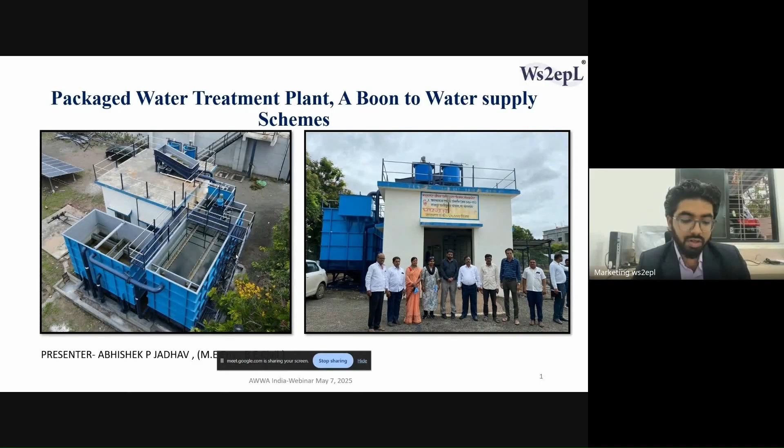Going back to a brief history of water treatment plants across Maharashtra, packaged water treatment plants' parenthood comes from unconventional treatment plants. In the 1970s, mostly large capacity conventional plants were constructed in large cities, and there were no plants in rural areas because scaling down conventional treatment plants meant conventional technologies were not suitable for small plants, as the cost went high.

Dependence on mechanical equipment, rotary parts, and electricity made them inappropriate for rural conditions. So the Government of Maharashtra led a large research program from 1970 to 1980 to find an appropriate solution for rural water treatment. As a result, unconventional plants were developed, which were cheaper to construct and simple for operation and maintenance. The earlier constructed plants consisted of a weir mixer, gravel bed flocculation, tube settling tank, and dual media filters.

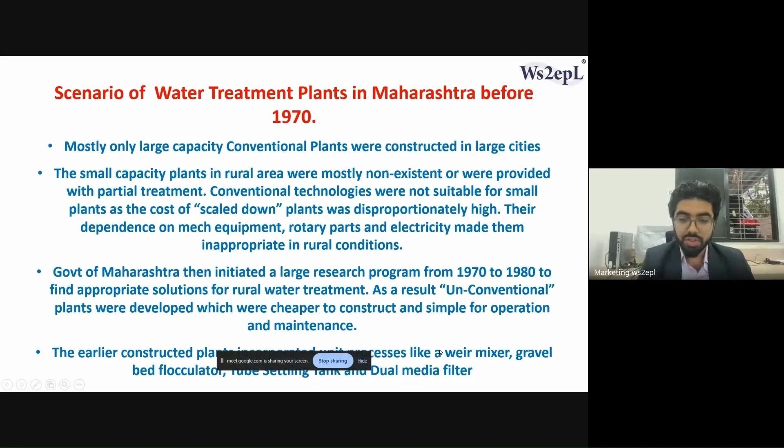The development of unconventional plants carried on from 2000. From 1970 to 2000, lots of unconventional treatment plants were constructed. The government took a review of all these plants and found that the unconventional treatment plants are sustaining in rural conditions and are still making very good progress.

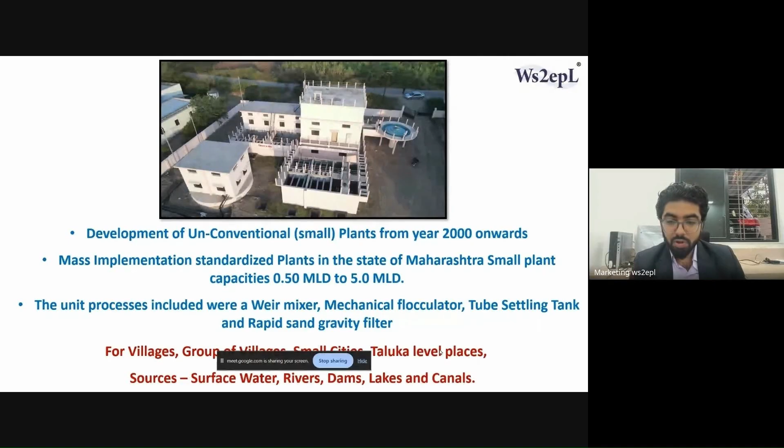The mass implementation and standardization of plants in the state of Maharashtra started from a capacity of 0.5 MLD up to 5 MLD. The unit processes include a weir mixer, mechanical flocculator, tube settling tank, and rapid sand gravity filters. This was especially for village groups, small cities, taluka places, with raw water sourced from surface water, rivers, dams, lakes, and canals. So why was there still a need for prefabricated package treatment plants?

In year 2000, the Government of India declared an ambitious program, the Jal Jeevan Mission, to provide safe drinking water to the entire population by year 2024, which is now extended up to 2027. To complete all these projects, the speed and correct execution of small plants was not possible with concrete tanks in remote places and in a time-bound period.

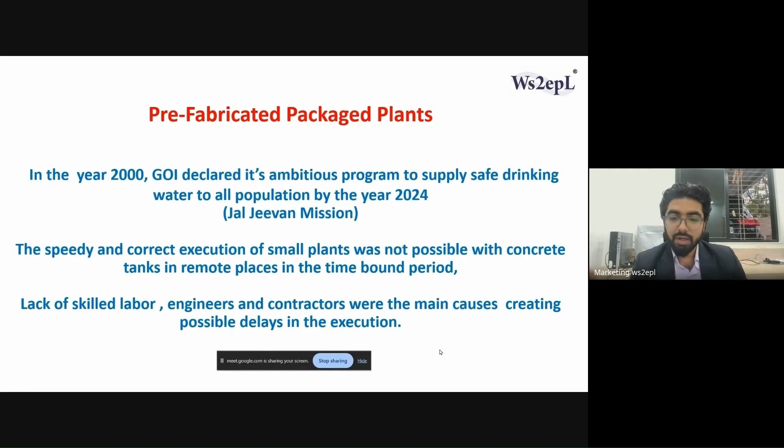Lack of skilled labor was an issue. Engineers and contractors were the main cause, creating possible delays in execution due to labor issues, material availability, and time-bound projects, which led to the development of prefabricated treatment plants.

Even before the Jal Jeevan Mission was declared, Maharashtra Jeevan Pradhikaran, the government body MJP, had already started developing prefabricated plants, because MJP had realized that for speedy and correct execution of small plants for mass application of water supply schemes in a time-bound period, package plants were a prerequisite solution.

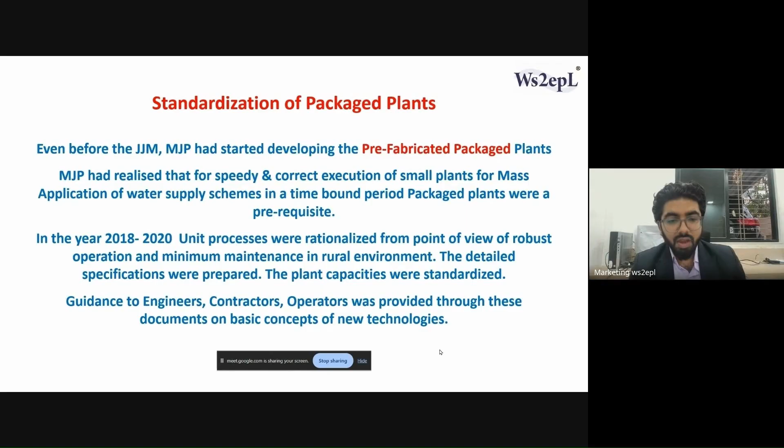In 2018 and 2020, unit processes were rationalized so that they should be robust for operation and come with minimum maintenance in any rural condition. Detailed specifications were prepared and put into the DSR, and plant capacities were standardized. Guidance to engineers, contractors, and operators was provided through documents based on the concept of new technologies.

Earlier, initial efforts for site fabrication were encouraging but not satisfying, as the desired quality required was not achieved with site fabrication, and tackling corrosion in mild steel was also a big issue. Hence it was decided to encourage shop manufactured, standardized, and transportable plants rather than site fabricated ones.

These plants are now manufactured in an MIDC area, an industrial area, stacked into a container, loaded onto flatbed trailers, and taken anywhere across the country.

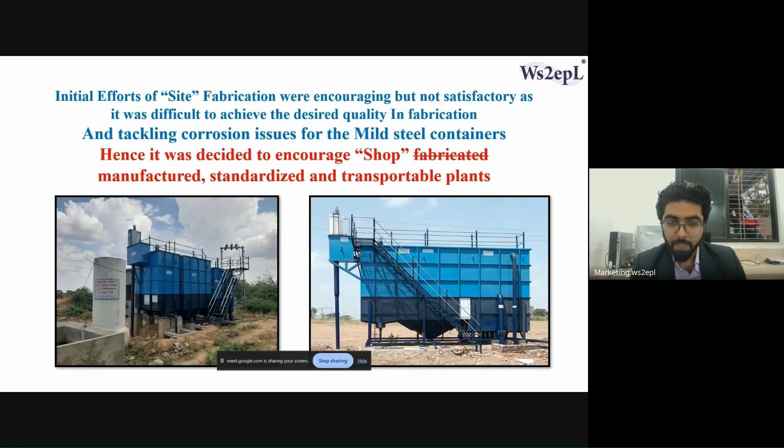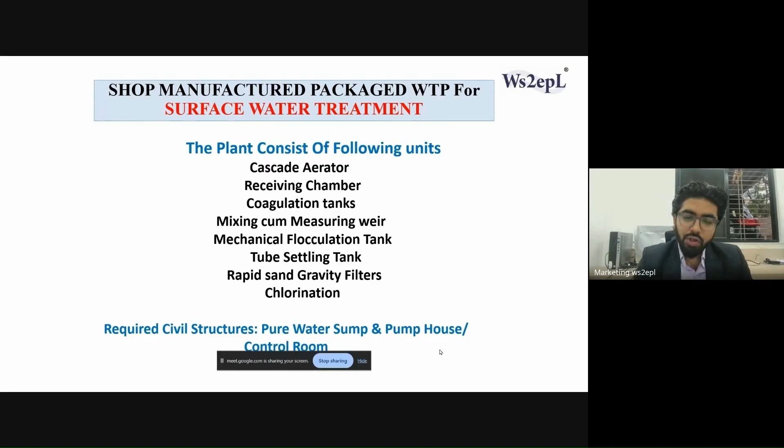Looking at the shop manufactured packaged water treatment plants, the units consist of a cascade aerator, receiving chamber, coagulation tanks, mixing cum measuring weir, mechanical flocculation tanks, tube settling tanks, rapid sand gravity filters, and chlorination. The only required civil structure here is a pure water sump and a pump house.

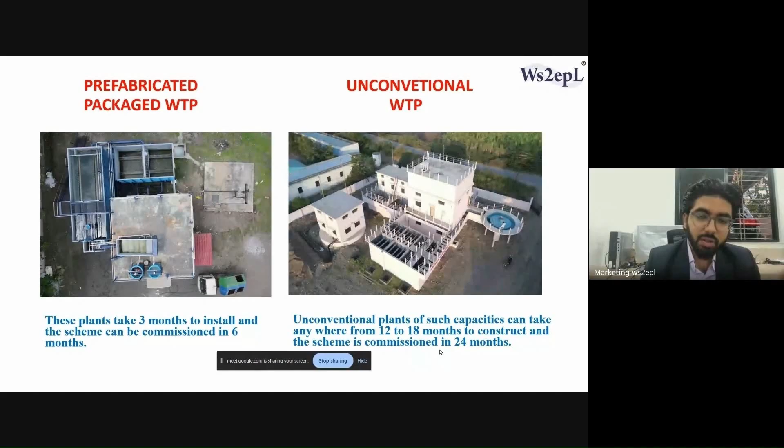Looking at the comparison of a prefabricated water treatment plant and a conventional water treatment plant, we can see on the left how the packaged treatment plant looks compact and takes less space. This plant takes about 3 months to install and can be commissioned in 6 months, while conventional treatment plants take anywhere from 12 to 18 months to construct and 24 months to commission. This is a big difference, and hence the prefabricated packaged WTPs are very positive and beneficial in rural areas.

Further, the water is taken into the stilling chamber. The stilling chamber dampens the water and the silt which comes with it, so the silt gets collected at the bottom, and it passes over the weir, the measuring weir notch. It has a V notch attached to it, which is also beneficial to measure the flow, and according to which the dosages can be set.

Further, it is taken into the mechanical flocculator, which agglomerates the coagulated particles into settleable floc, with a detention period of 10 to 20 minutes. This agitator has a revolution speed of 4 to 6 RPM.

Now this water from downward is taken up into the tube settlers from the floc distributor pipes in the upward direction, installed with tube settlers in the center. These tube settlers are at a 60-degree inclination. The treated water gets taken up into the collection trough, and the settleable floc settles on the surface of the tubes and is taken down to the hopper bottom, where it can be drained.

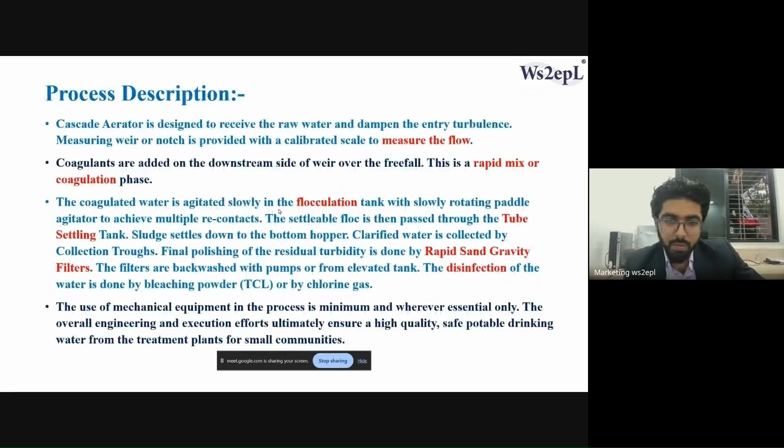As I've already explained this process, the only mechanical rotating equipment here is the mechanical flocculator, thus the required maintenance is minimized for the whole packaged water treatment plant.

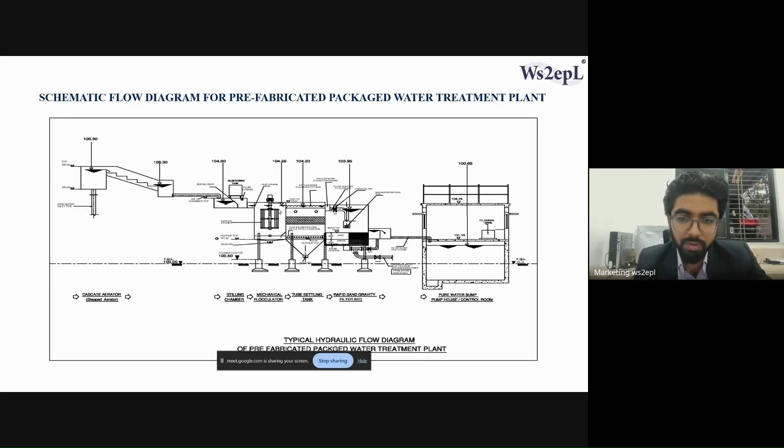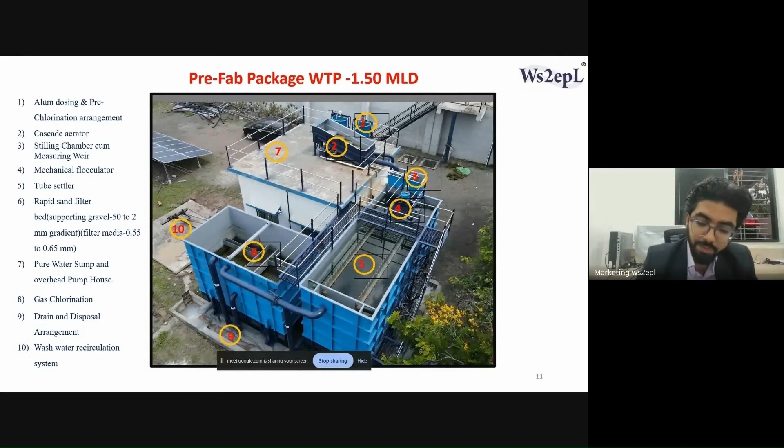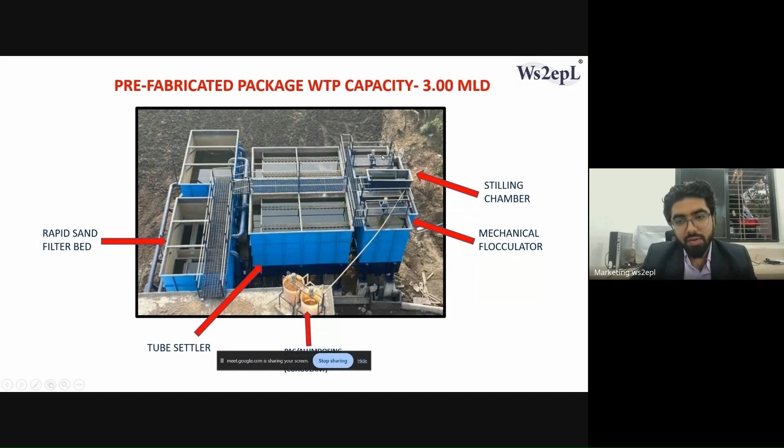Now this is a prefabricated packaged WTP of capacity 3 MLD, which is nothing but two streams of 1.5 MLD each, with the stilling chamber at the center, the mechanical flocculator, tube settlers, and rapid sand filters. So two streams of 1.5 MLD are attached together to make a 3 MLD capacity plant.

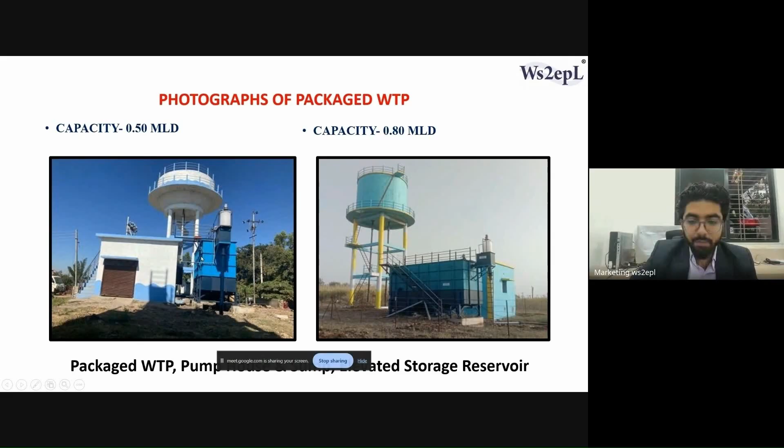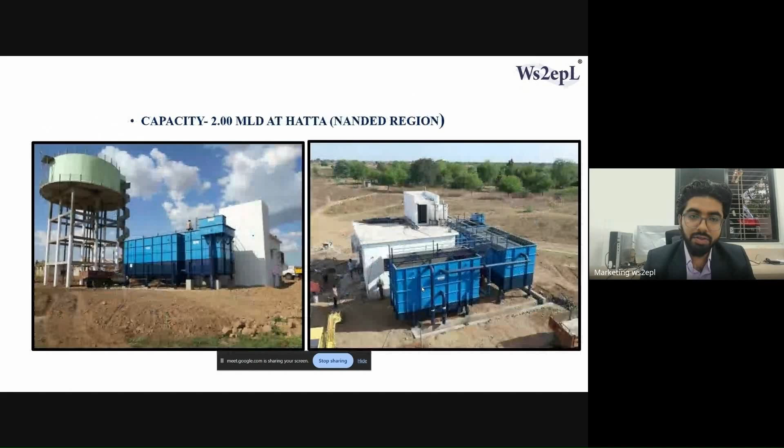These are a few standardized photographs of water treatment plants: a 0.5 MLD capacity plant, showing how compact it is for the scheme, with the ESR and pump house beside it; a 0.8 MLD capacity treatment plant; 1.5 MLD capacity treatment plants; and a 2 MLD plant at Hatta in the Nanded region.

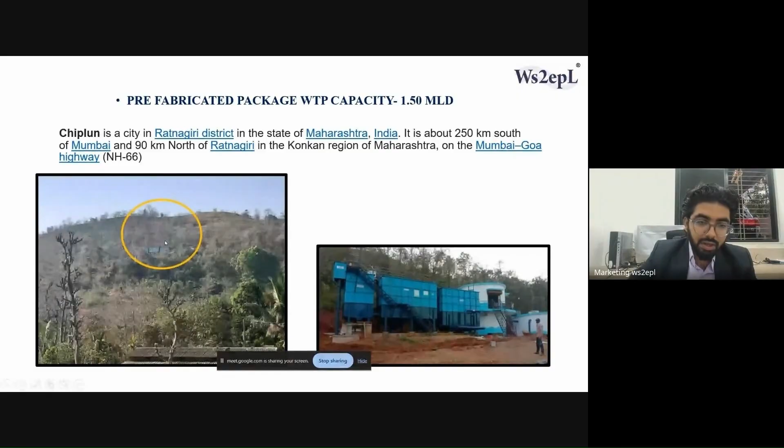That's how they are manufactured in a shop, transported on a trailer and taken up. So the minimum space required for prefabricated packaged WTPs from capacity of 0.5 MLD is minimum 100 square meters of area, and for 3 MLD, that is 412.50 square meters of area.

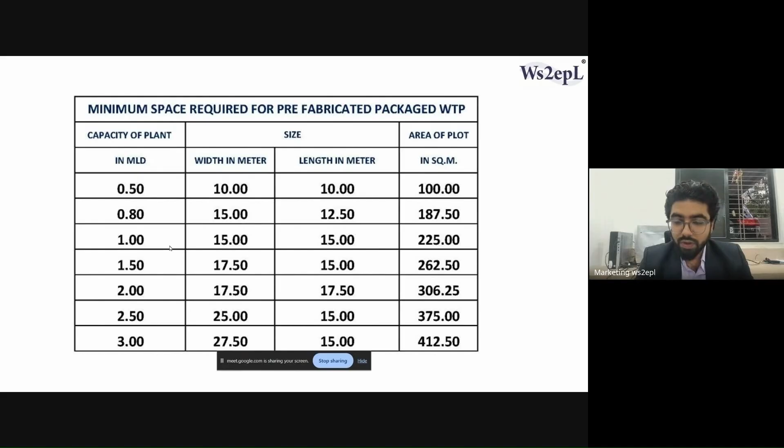Salient features: since the construction of small plants in RCC is cumbersome and time consuming, shortage of skilled labor in rural areas further complicates the projects. Hence, prefabricated ready-to-erect plants is an attractive and alternate option for speedy execution of water supply schemes. This system is a modular system, hence quick and easy to deliver.

This requires minimum space, is shop manufactured, hence quality is very assured, cost-effective on-site treatment, and the quality of treated water is as per CPHEEO norms. According to research on the treatment plants, it was found that raw water turbidity was 25 to 50 NTU, and the treated water was less than 1 NTU.

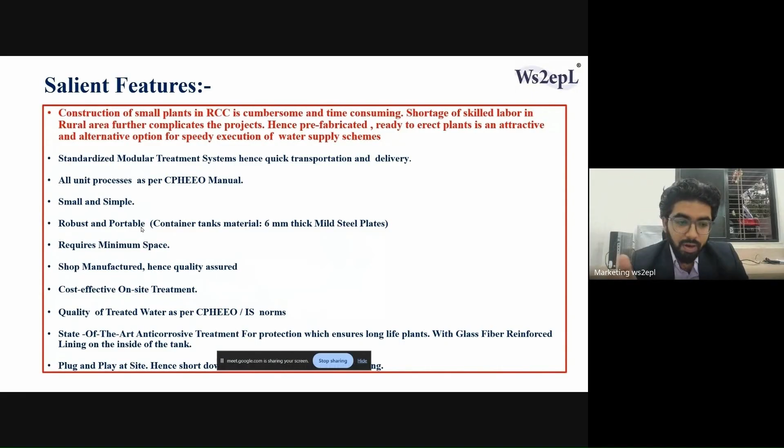State-of-the-art anti-corrosive treatment for protection ensures long life of plants with glass fiber lining on the inside of the tank. Plug and play at site.

List of organizations where these plants are in operation: Peri-Urban Scheme, Maharashtra Jeevan Pradhikaran, Mukhyamantri Rural Drinking Water Program, Metropolitan Regional Development, Nagar Panchayat, Gram Panchayat, Jal Jeevan Mission, and so on.

I want to thank AWWA again for giving me this opportunity and allowing me to present at this webinar on such an important topic. Thank you.

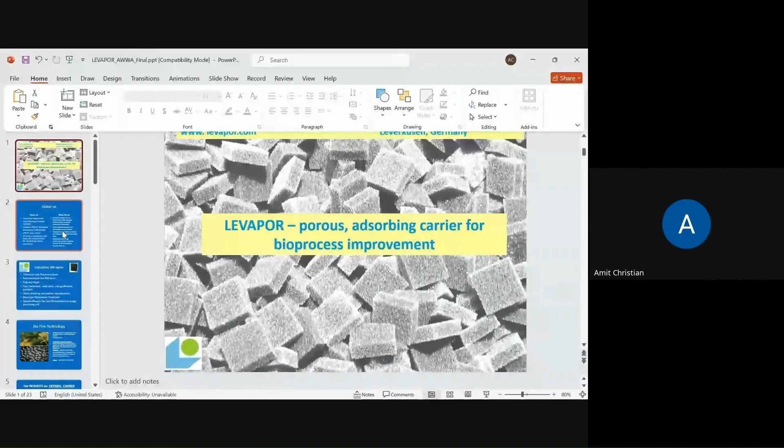First of all, I would like to thank AWWA for giving us this opportunity to present our technology and case study pertaining to the technology. We, as Biofilm Tech GmbH, are a Germany-based organization founded by Dr. Imre Pascik, who has more than 40 years of experience working with Bayer AG at their Environmental Biotechnology Center.

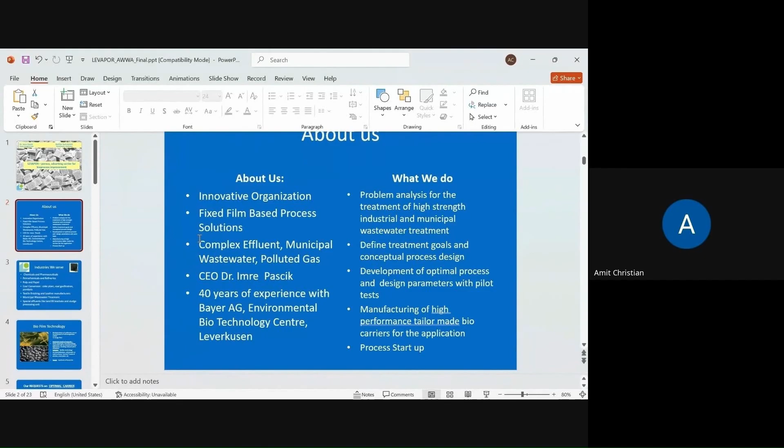As part of our offering, we offer a complete process solution, starting from problem analysis to process startup and commissioning for various wastewater treatment requirements. We serve various industries such as chemicals, pharmaceuticals, petrochemicals, as well as pulp and paper industries, along with municipal wastewater treatment requirements for BOD/COD removal, as well as ammonia removal requirements.

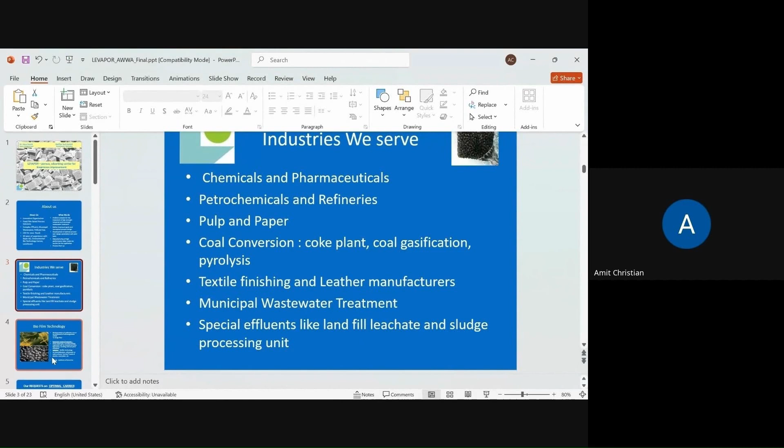During our journey in wastewater treatment in the early 80s, we observed that biodegradation of any specific wastewater organic pollutant occurs through teamwork of microorganisms, and those microorganisms become part of an activated sludge floc, which we retain in the activated sludge process for the required removal.

However, there are certain important organisms which are very much essential for the biodegradation of a particular complex molecule or ammonia-containing substance. But due to their non-flocculating nature, they get washed out from the bioreactor. Despite getting developed in the reactor, we are not able to retain them in the activated sludge floc, so the performance of the activated sludge gets compromised and we don't get the desired results.

So to retain these non-flocculating organisms, which are very much essential and important for the biodegradation of wastewater, there are various ways available. One of them is to immobilize them in a biofilm on a carrier surface and retain them within the activated sludge reactor. There are various materials available for developing biofilm and immobilizing the carrier microorganisms, including plastic, sand, glass, or PP material, HDPE material.

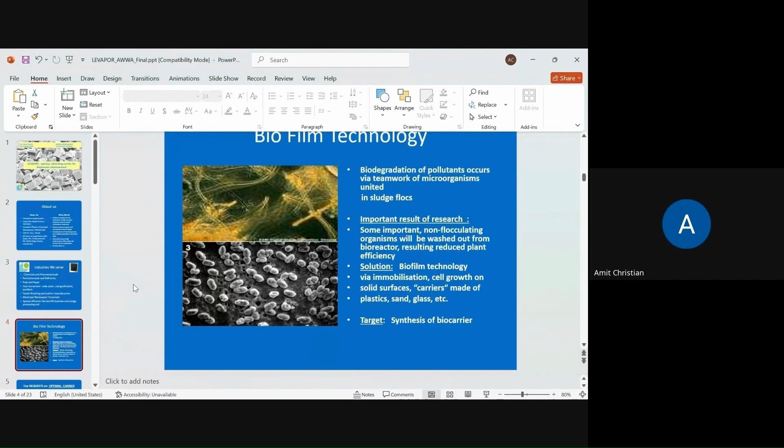To develop a carrier which provides ideal habitat for retaining microorganisms within any activated sludge process, our team at BioFilmTech realized that an optimal carrier should have good adsorbing capacity for toxic pollutant binding, which also allows faster colonization and quick biofilm formation, so that the startup of the process can be shortened.

It should have high inner porosity and high surface area to allow protection of biofilm and high space-time yield. It should have fast wetting properties which allow homogeneous fluidization of the carrier material within the aeration tank, and good water binding properties so that it allows mass transport and good bioactivity, and it should be lightweight to reduce fluidization energy consumption requirements.

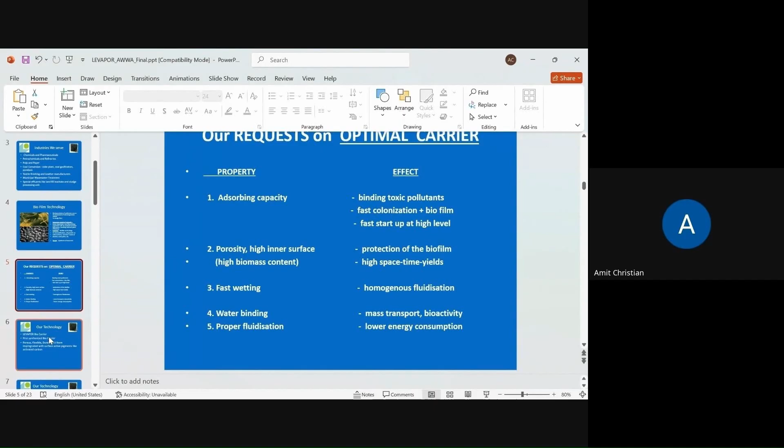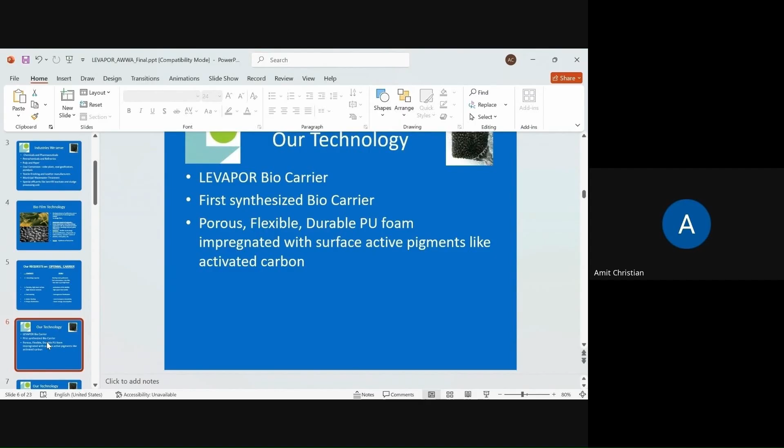Considering these basic optimal properties of an optimal carrier for biological wastewater treatment, our team at BioFilmTech has developed a carrier made of technical grade reticulated PU foam, and we are impregnating this reticulated PU foam with surface active pigments like activated carbon and other additional pigments.

Because of this combination of the high surface area active PU foam and activated carbon, our carrier has a very high amount of adsorbing surface, which allows rapid microbial colonization and biofilm formation. It also allows temporary adsorption of toxic and inhibitory substances, which can then be biodegraded by the microorganisms present on the biofilm.

It has a surface area of around 13,500 to 20,000 meters square per meter cube, and a slightly higher specific gravity of 1.02 to 1.04 compared to water, so it becomes part of the activated sludge bed very easily. On a dry weight basis, the weight of the carrier material is only 25 kilogram per meter cube of media, which reduces the energy consumption requirement for fluidization of the carrier material.

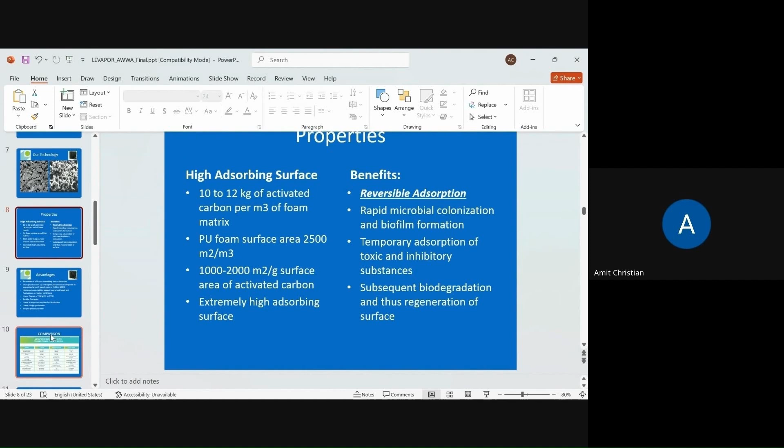A combination of these properties offers a lot of advantages for biological wastewater treatment, which reduces the process startup time. It helps us increase performance, providing better removal efficiency at higher volumetric loading rates, so that it reduces the footprint of the plant as well.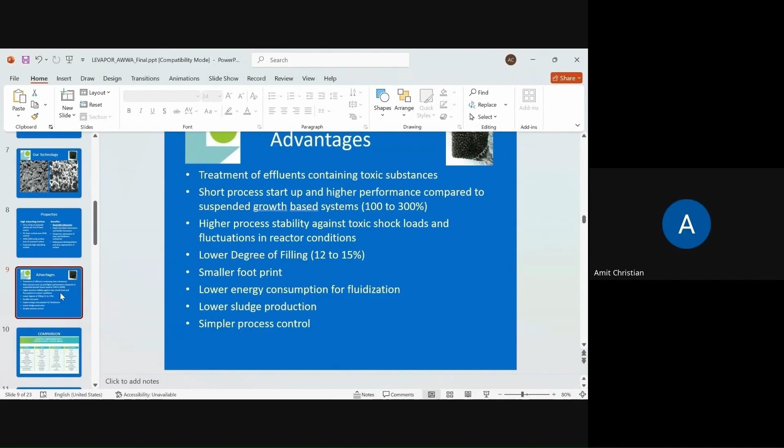Compared to conventional plastics, we require only 12 to 15% of volumetric filling requirement for the media, and it reduces sludge production, and also provides better sludge settling properties, improving clarifier performance as well. So compared to conventional plastic media, these are the specific benefits of our carriers.

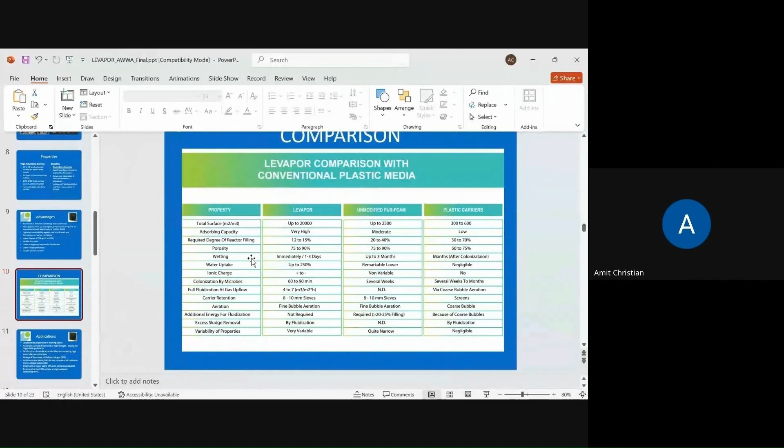Over the past 20 years, we have applied the technology for the upgradation of existing sewage treatment plants, for anaerobic aerobic treatment of high strength effluent, for nitrification denitrification of high ammonia effluents as well, and as an MBBR IFAS process solution for municipal wastewater treatment, both for rural as well as urban areas.

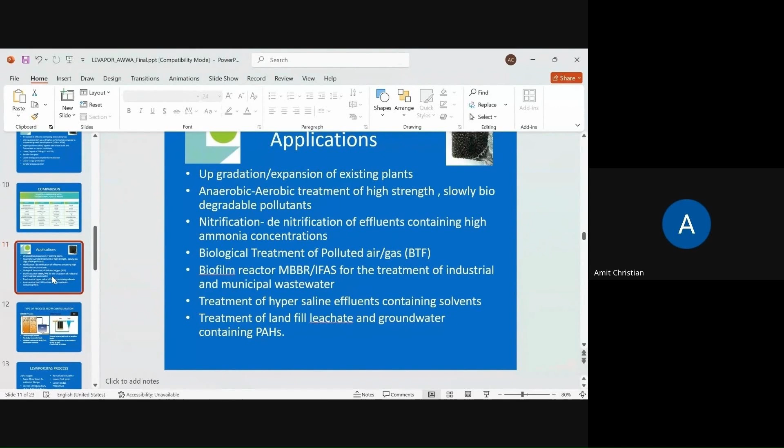Conventionally, any free-floating media-based attached growth processes are offered in two process configurations. One is the MBBR process, which is moving bed bioreactor, and another is the IFAS process, which is integrated fixed film activated sludge process. In the moving bed bioreactor, it is a kind of once-through process where we assume that all the biodegradation will be happening on the attached growth media or moving media present in the reactor.

There is no sludge recycle back in the system for MBBR. While in the IFAS process, the MLSS, just like conventional activated sludge process, is recycled back to the system, and in the suspended phase, a significant amount of biomass is also present.

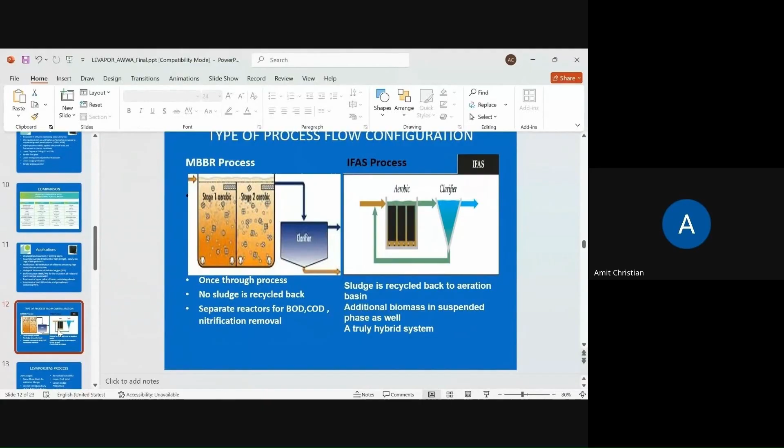So IFAS process is a kind of truly hybrid process which combines benefits of both activated sludge process as well as attached growth process, which has specific advantages, such as having the same flow sheet as activated sludge process, and the operational and maintenance requirements for the processes are also the same as activated sludge process.

It can be configured with any activated sludge process model like MLE, A2O, or plug flow type reactor, or step feed type of reactor. And at least compared to one standalone suspended growth process or standalone MBBR unit, it offers remarkable process stability, lower footprint, lower sludge production, and lower energy requirement.

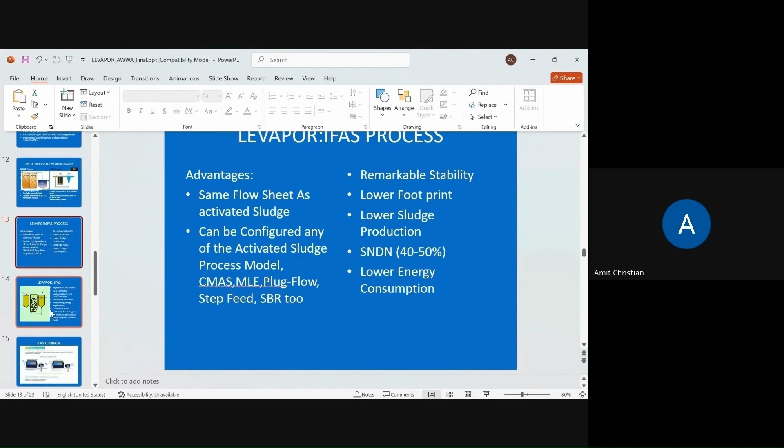So in our process solutions, we are offering Levapor carriers as an IFAS process solution, which is basically a single tank or single basin construction with 12 to 15% filling ratio of Levapor carriers, and the system can be operated at a higher loading rate of 2.5 to 4 kg COD per meter cube tank volume, reducing the footprint of the biological wastewater treatment process a lot.

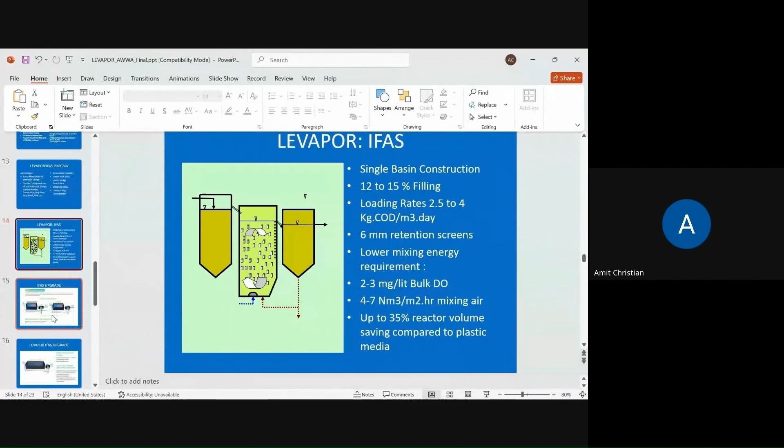And it can be operated at 2 to 3 ppm bulk DO concentration and can be applied with both fine bubble as well as coarse bubble diffused aeration systems without any problem, due to the specific geometry of the Levapor carriers.

One specific application of Levapor carriers based IFAS process is the upgradation of existing activated sludge plants. Conventionally, existing activated sludge plant upgradation for higher capacity ammonia removal requires doubling the volume of the aeration tank, which requires new construction and new land requirement. It may also require a new clarifier along with the new aeration tank. So it has a very high level of capex and opex involved in the upgradation project.

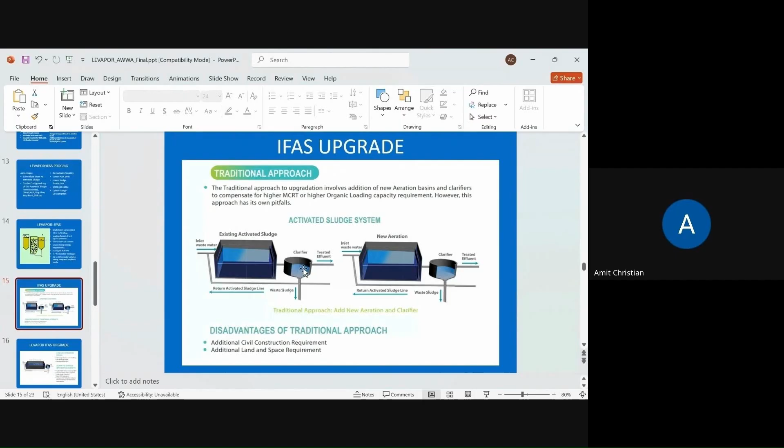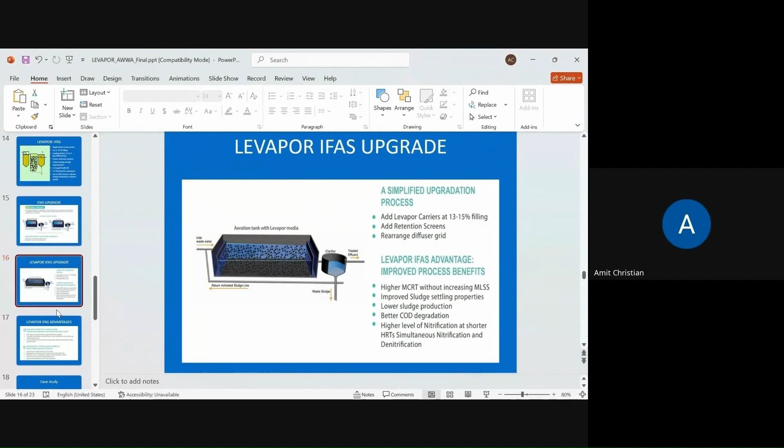But with the help of Levapor carriers, we can add them at a 12 to 15% filling ratio in the existing aeration tank, rearrange the diffuser grids, provide a retention screen at the outlet of the effluent weir, and the same aeration tank capacity can be doubled to take almost double the flow rate and achieve both BOD removal, COD removal, as well as ammonia removal as per the required new NGT norms or the new stringent ammonia standards. The specific advantage is that we don't require additional land.

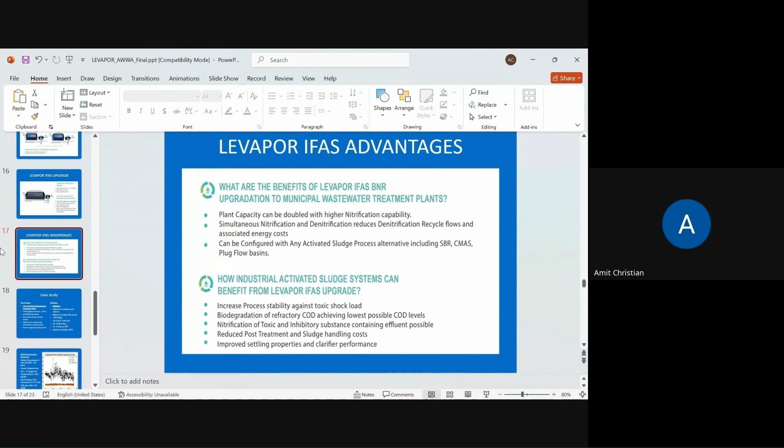We don't need to reconfigure the entire activated sludge process. The overall process management philosophy for the upgrade process also remains the same as conventional activated sludge, and it can be utilized with any activated sludge process configuration.

I would like to present a specific case study of a 20,000 meter cube per day municipal wastewater treatment plant for a city in the northern province of China. During the year 2010, Ning'an city was constructing a 20,000 meter cube per day sewage treatment plant for their BOD removal requirement. However, all of a sudden their legislation changed, and they required the plant to be designed with COD less than 50 ppm and ammonia less than 5 ppm.

Due to very much space restriction as well as limited availability of additional budget for civil construction, we offered them a solution to utilize the existing constructed activated sludge tank of 3,200 meter cube volume, with addition of 15% Levapor carriers, having 480 meter cube of Levapor carriers in the tank. We helped them upgrade the plant to 22,000 meter cube per day flow rate with a target to achieve COD less than 50 ppm and ammonia less than 5 ppm.

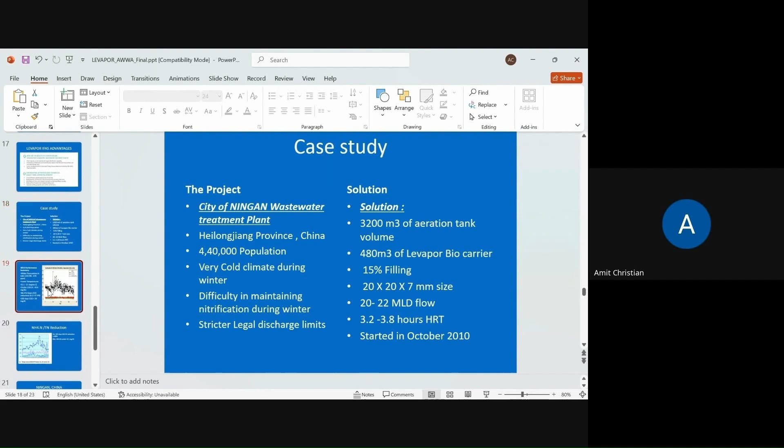Despite startup during October, which is basically a winter month in the northern provinces of China, the plant was able to commission within 3 to 4 weeks time for COD removal, and it consistently achieved the required level of 50 ppm COD as per the Chinese government requirement.

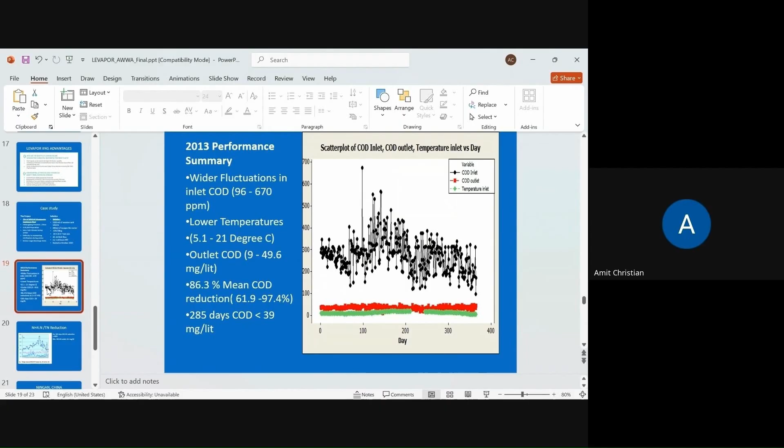And despite not having much skilled labor to operate and monitor the plant, it is consistently achieving the outlet requirement of COD less than 50 ppm, and for more than 285 days, COD is less than 39 ppm at the outlet of the secondary clarifier. We need to understand that this whole project is in a very harsh winter weather condition, whereby the ambient temperature is plummeting as low as -15 to -20 degrees Celsius.

For ammonia removal also, for nearly 182 days, the plant is achieving more than 80% ammonia removal, meeting the client's requirement of less than 5 ppm. And due to a very high amount of simultaneous nitrification-denitrification happening on our carriers, they are also able to achieve total nitrogen less than 15 ppm for their legislative requirement, without having any pre-anoxic tank in the plant's process flow.

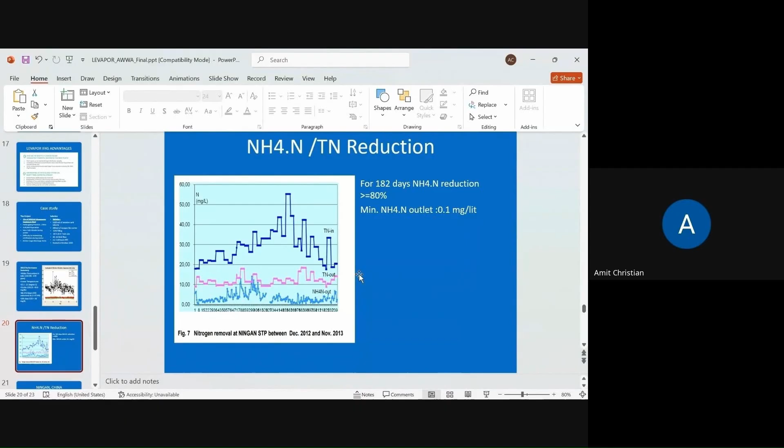So with the help of Levapor technology, we have been able to help the province achieve their compliance requirement with a robust process, delivering the required results consistently for the last 15 years with the same carrier material. The process stability is so remarkable that even normal unskilled laborers are able to operate the plant without any problem, reducing clients' operational costs as well as total capital cost requirement significantly.